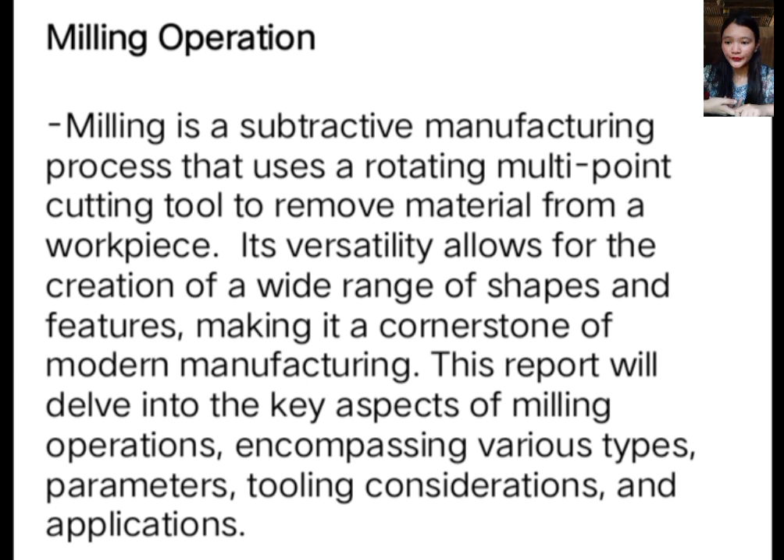First discussion is types of milling. The choice of milling operation depends on the desired outcome and workpiece geometry. Common types include face milling, used to create flat surfaces by removing materials from the workpiece's face. This is often the initial step in preparing a workpiece for subsequent operations. High material removal rates are achievable.

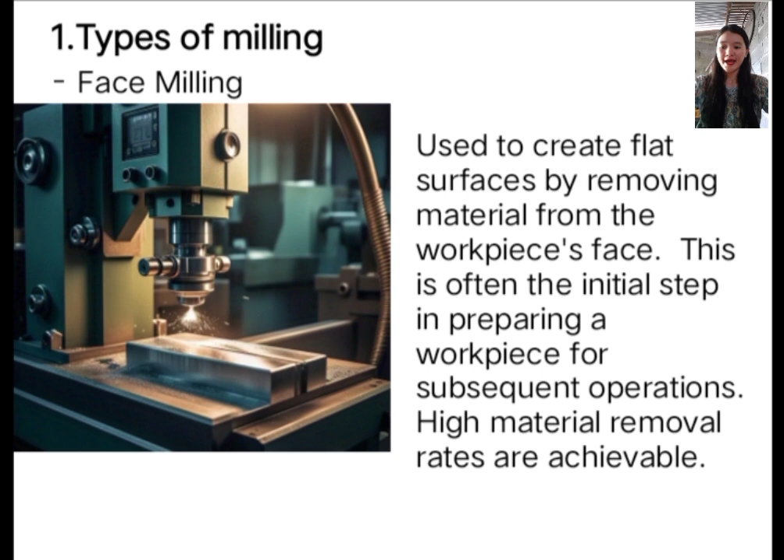End milling employs cutters with cutting edges on both the periphery and the ends, enabling both face and profile milling in a single setup. This is highly versatile for creating complex shapes and features. Various end mill designs cater to specific applications, such as ball nose end mills for curved surfaces or square end mills for sharp corners.

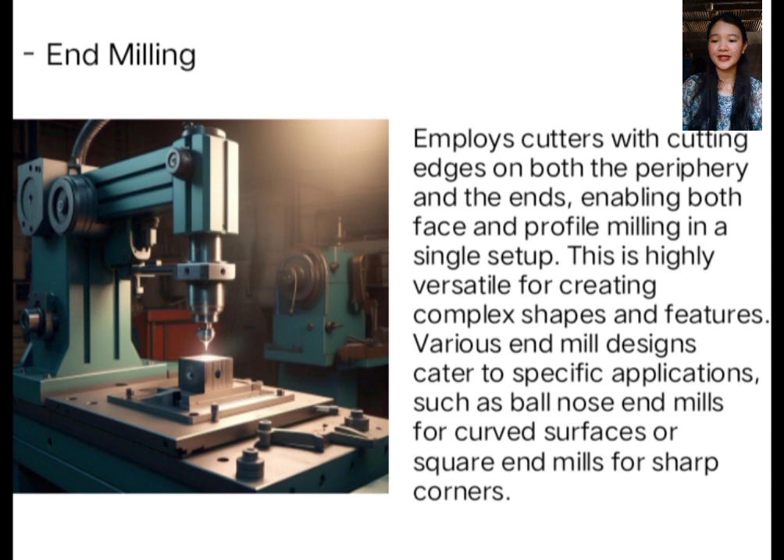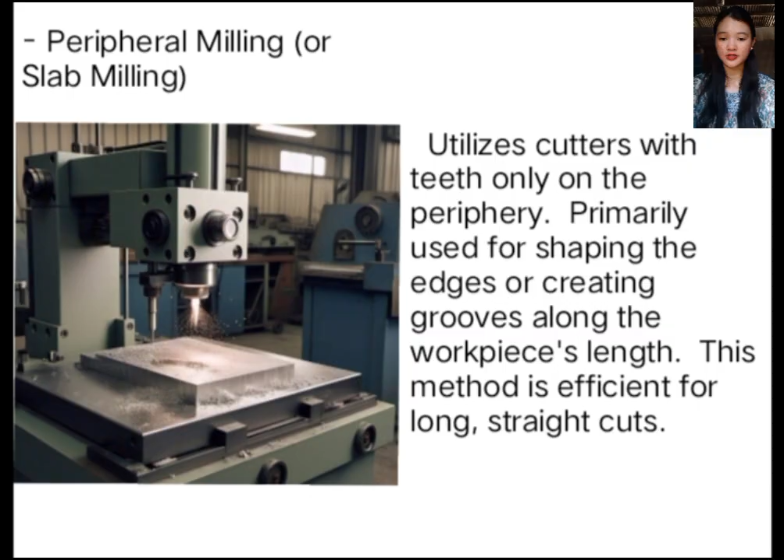Peripheral milling or slab milling utilizes cutters with teeth only on the periphery, primarily used for shaping the edges or creating grooves along the workpiece's length. This method is efficient for long, straight cuts. Slot milling is a specialized form of peripheral milling designed to create narrow slots or grooves of precise dimensions. Different cutter designs exist to accommodate various slot widths and depths.

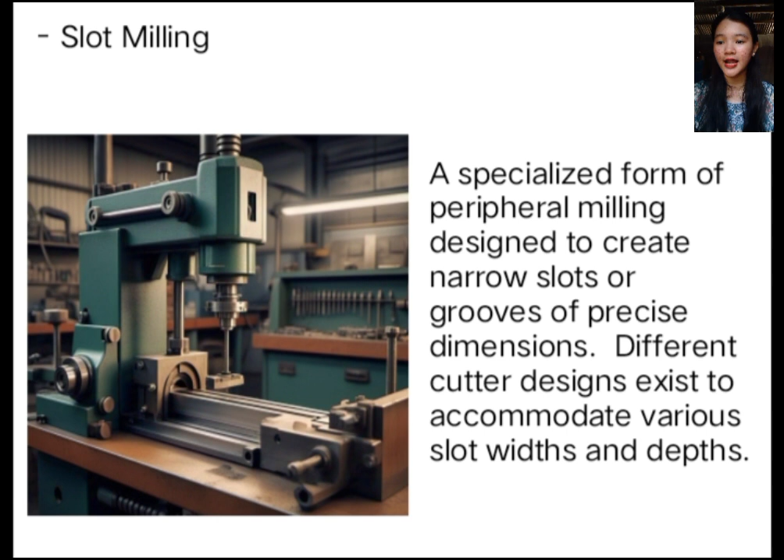Plain milling is a type of peripheral milling where the entire length of the cutter engages with the workpiece, removing material across its width. This method is suited for creating flat surfaces and removing significant amounts of material.

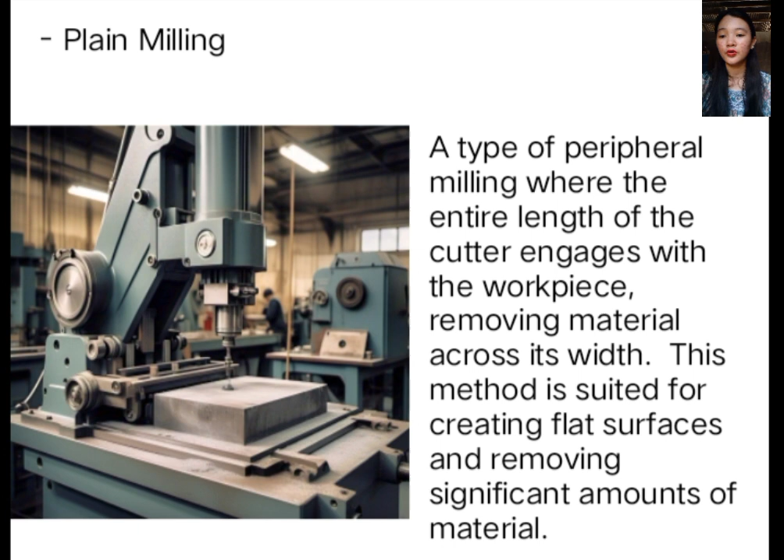So let's proceed to cutting parameters. Optimizing the process. Achieving optimal results in milling requires careful selection and control of cutting parameters. These parameters significantly influence surface finish, machining time, tool life, and overall process efficiency.

So, parameters include spindle speed, RPM, the rotational speed of the cutter. This is crucial for achieving the desired cutting speed V and is determined by the cutter diameter D and the desired cutting speed, V equals πDN/60, wherein N is the spindle speed in RPM. Selecting an appropriate spindle speed is vital to prevent tool breakage or excessive wear.

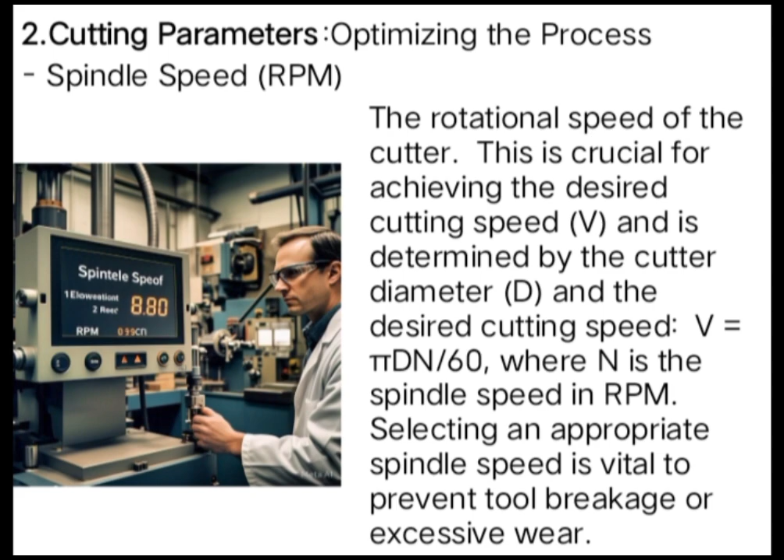Feed rate, the rate at which the workpiece moves relative to the cutter. This parameter affects the material removal rate and workpiece finish. A higher feed rate can increase productivity but may compromise surface quality or tool life if excessive.

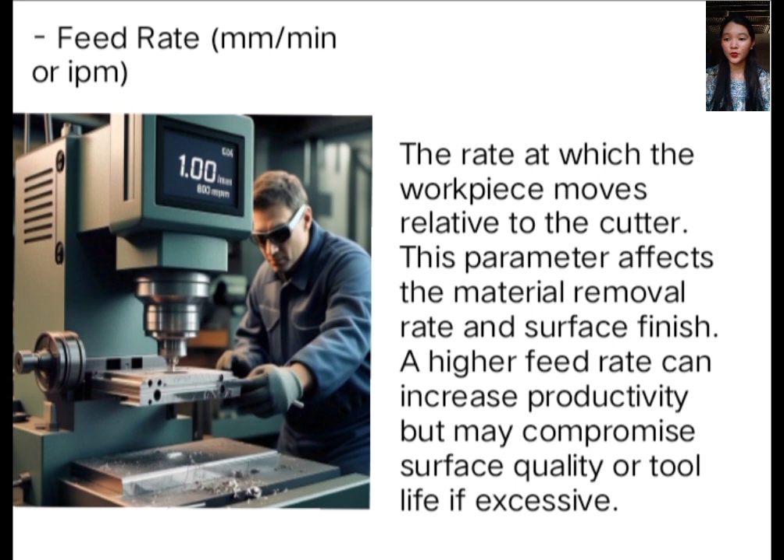Depth of cut, DOC, the amount of material removed in a single pass. Multiple passes are often necessary for deeper cuts. A larger depth of cut can increase productivity but may also lead to increased cutting forces and tool wear.

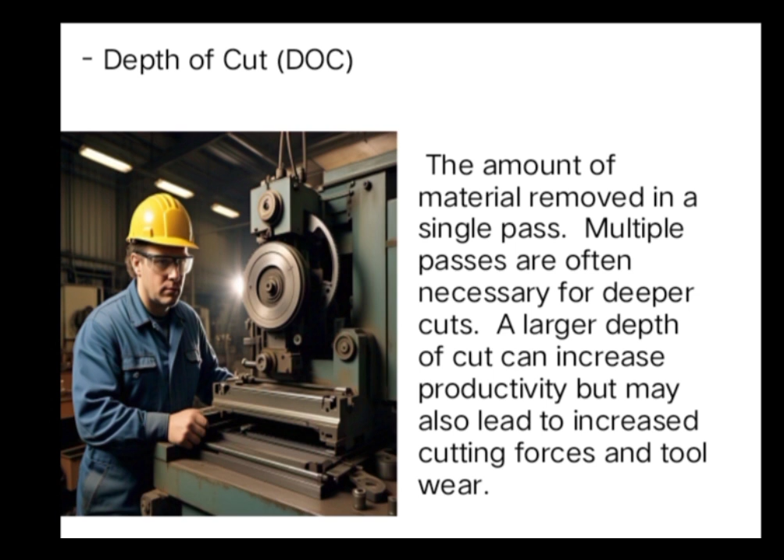Cutting fluid, essential for lubrication and cooling, reducing friction, heat generation, and tool wear. The choice of cutting fluid depends on the materials being machined.

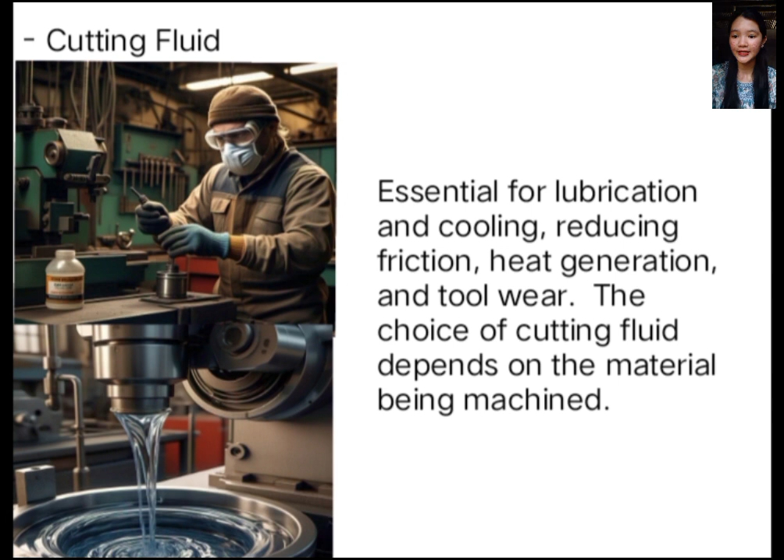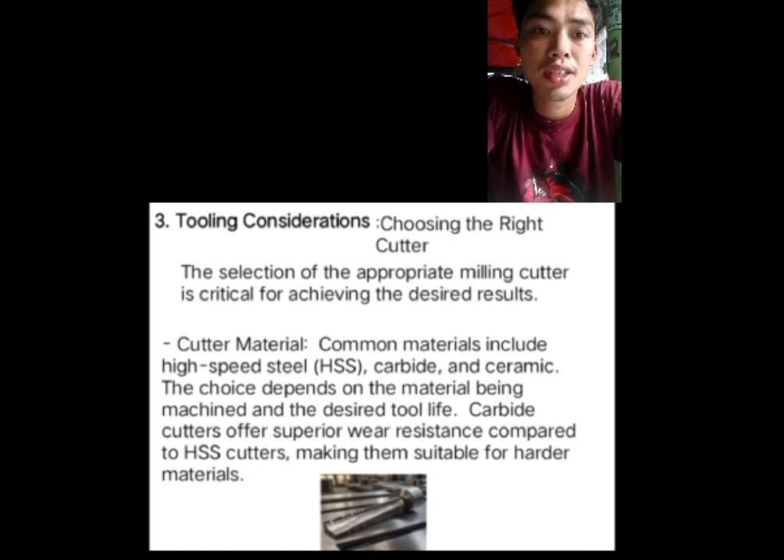Tooling considerations. Choosing the right cutter: the selection of the appropriate milling cutter is critical for achieving the desired result. Key factors include cutter material. Common materials include high-speed steel, HSS, carbide, and ceramic. The choice depends on the material being machined and the desired tool life. Carbide cutters offer superior wear resistance compared to HSS cutters, making them suitable for harder materials.

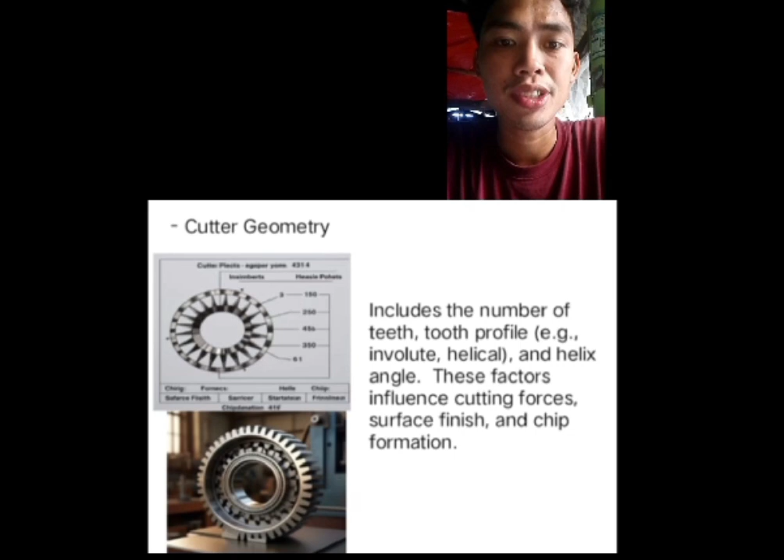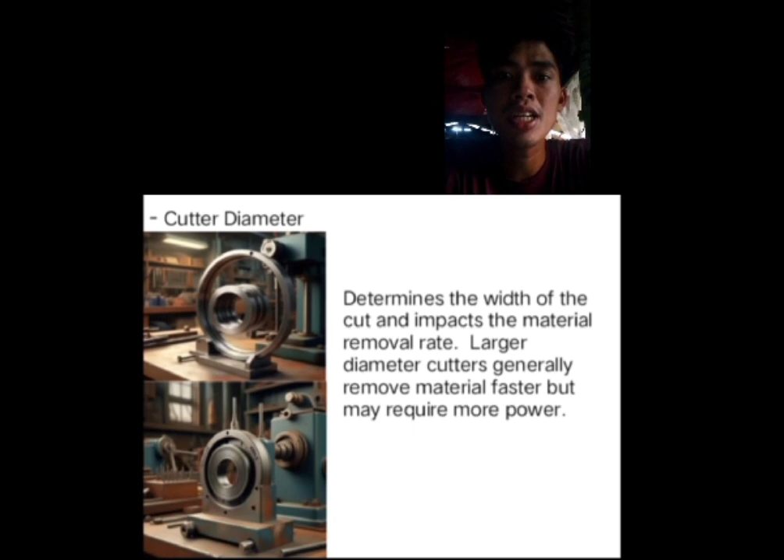Cutter geometry includes the number of teeth, tooth profile, e.g. involute or helical, and helix angle. These factors influence cutting force, surface finish, and chip formation. Cutter diameter determines the width of cut and impacts the material removal rate. Larger diameter cutters generally remove material faster but may require more power.

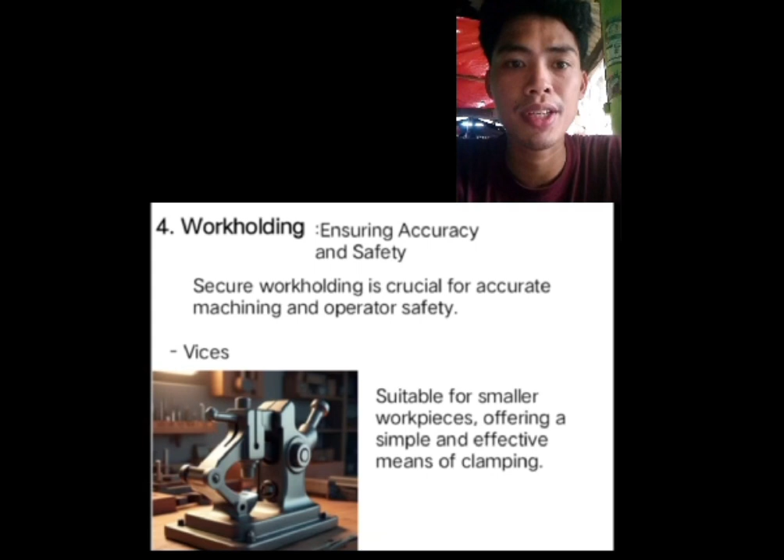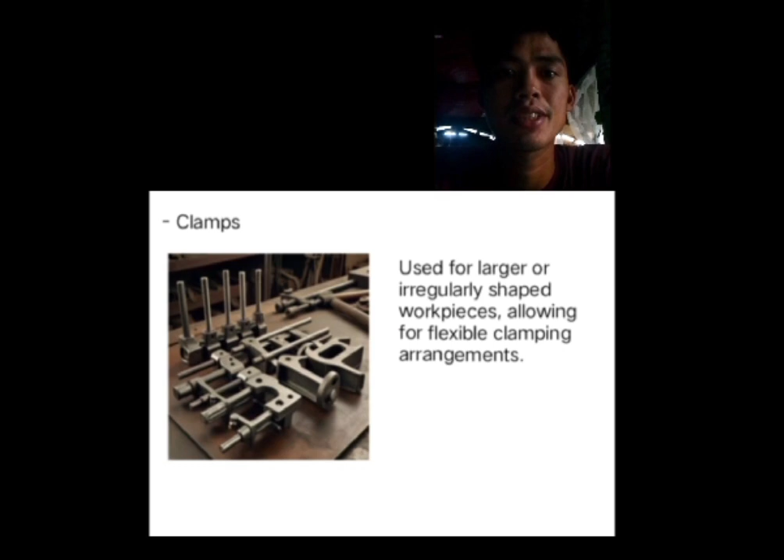Number 4. Work holding, ensuring accuracy and safety. Secure work holding is crucial for accurate machining and operator safety. Methods include vises, suitable for smaller workpieces, offering a simple and effective means of clamping. Clamps, used for larger or irregularly shaped workpieces, allowing for flexible clamping arrangements. Fixtures, specialized devices designed for specific machining operations, ensuring precise workpiece positioning and repeatability.

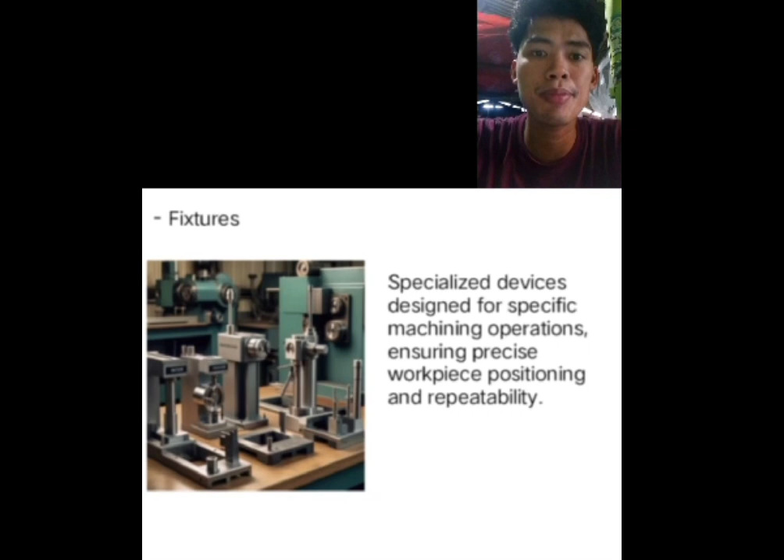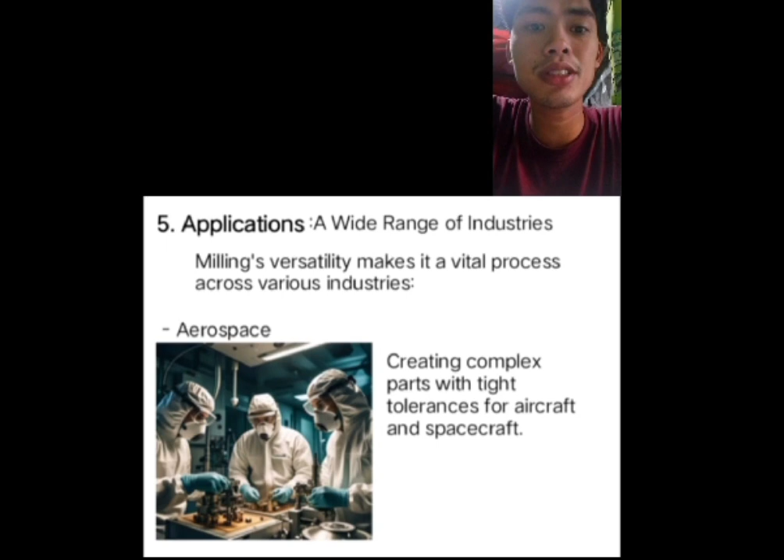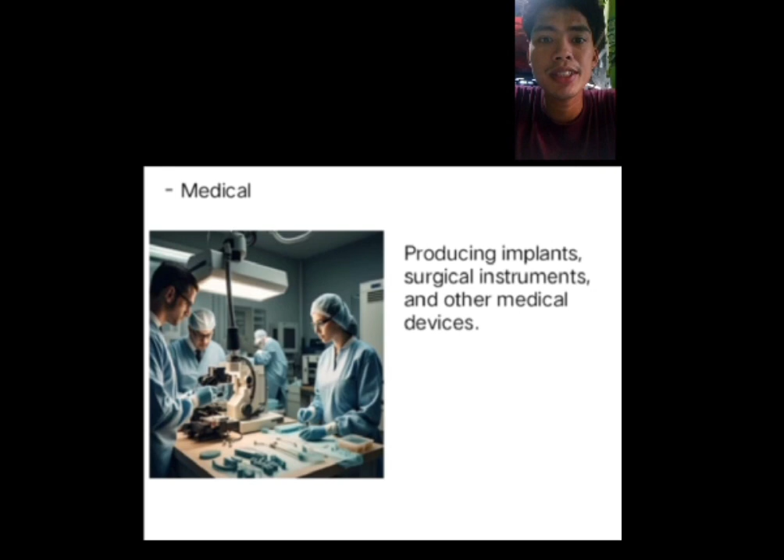Applications across a wide range of industries. Milling's versatility makes it a vital process across various industries. Aerospace: creating complex parts with tight tolerances for aircraft and spacecraft. Automotive: manufacturing engine components, transmission parts, and body panels. Medical: producing implants, surgical instruments, and other medical devices. Manufacturing: widely used for creating parts for diverse applications.

Conclusion: milling is a fundamental machining process with broad applications. Understanding the various types, parameters, tooling, and work holding techniques is crucial for achieving optimal results. Continuous advancements in cutter materials, machining technology, and cutting strategies continue to enhance the efficiency and precision of milling operations. Further research into specific milling techniques and advanced machining strategies will further refine the understanding of this vital manufacturing process.